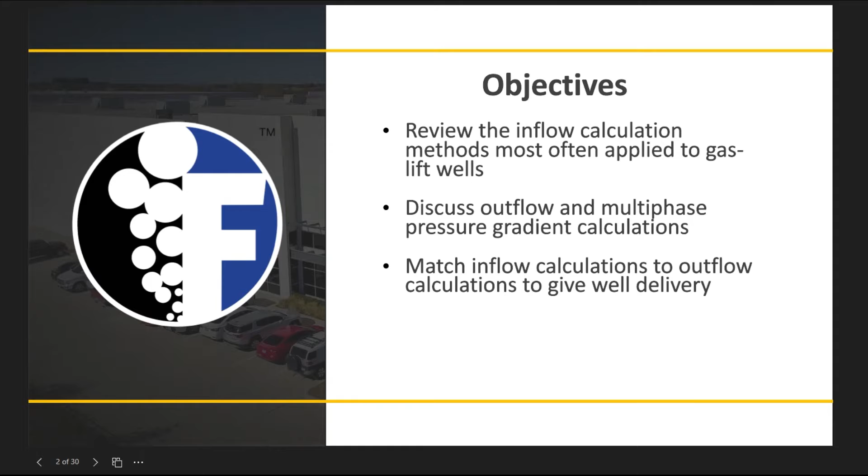Okay, so guys, we're on Series 4 this year, another technical presentation, primarily focused on production optimization utilizing a nodal analysis software. The objective of this presentation, and why we want to use some kind of nodal program for production optimization, is we want to look at both the inflow - what the well is capable of delivering - as well as the outflow, how we handle that production out of the well. We ultimately want to match those two up.

The inflow, we're going to be matching the production of the well, and the outflow is the only thing that we can really control. Good point. And with that outflow, like Robert mentioned, there's multiple ways to match it up.

If we have things like a downhole gauge or maybe an ESP on the well where we can actually collect that flowing bottom hole pressure, we can do a 1 or 2 production test Vogel IPR curve. If we have reservoir pressure, we can build onto that as well. So we'll point out some different ways to build that inflow calculation.

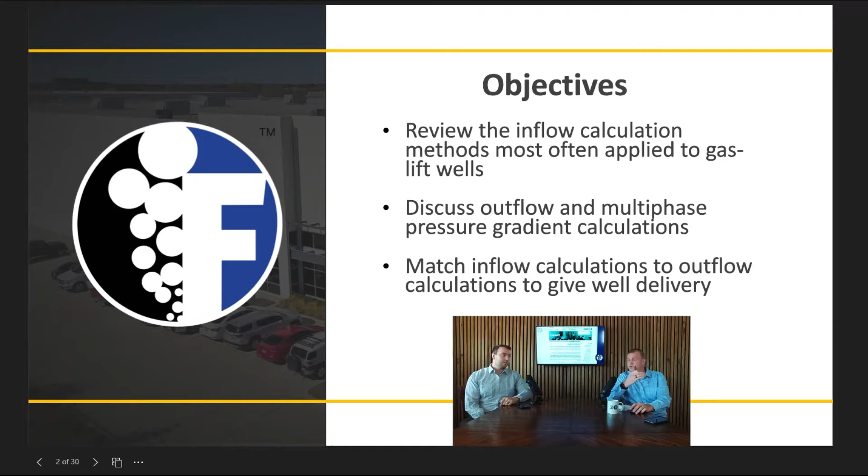But primarily we want to focus on the outflow, because those are the things that as a vendor, an operations group, or an engineer, we can control. We're in the artificial lift business, so that's what we're looking at. That curve is as pretty as possible - we live and die by those outflow curves.

So a couple things for anybody new to it: we'll call it an outflow curve, a multi-phase flowing gradient, a VLP curve. They're all essentially the same thing - it's the wonderful world of the oil field where one thing is named 5 different ways. Vertical lift performance - I like that one. Okay, we'll try to stick with that today.

But one of the pieces we look at from the VLP, that vertical lift performance curve, is it's a mix of a couple things. Ultimately, it is your flow diameter from tubing or perforations up to surface. Let me grab my pointer here so we can show it a little better.

Additional things that compound or add to that VLP curve are: what's our wellhead pressure, and more importantly, what's that pressure drop between our wellhead and our separator, typically controlled by flow line diameter and length. So we'll look at our surface piece that affects the VLP curve, and of course our VLP curve based off of flow area, PVT properties, production rates, things like that.

Ultimately, we're trying to match this flowing bottom hole pressure with our inflow to get the best production out of the well we can.

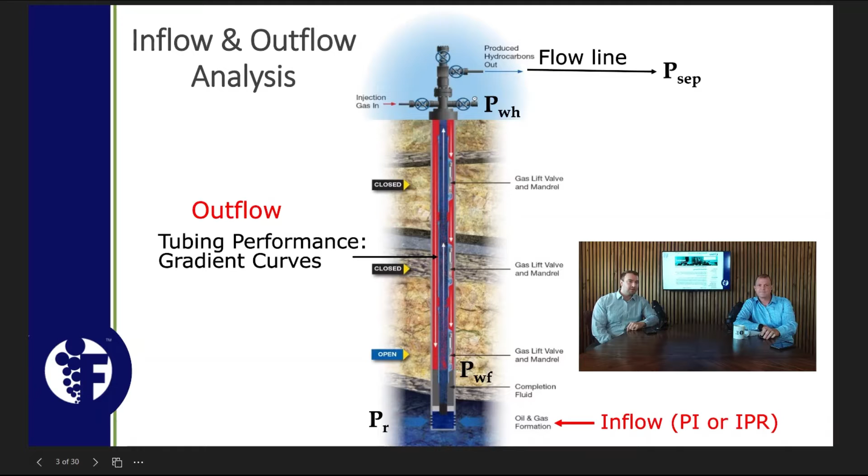But before we get started, we've got a nice little video here - borrowed from Neil over at Zeitecs. In my opinion, he does a really good job summarizing what we're going to talk about today between inflow and outflow. So we'll play this quick video for you guys, then get back into the presentation content.

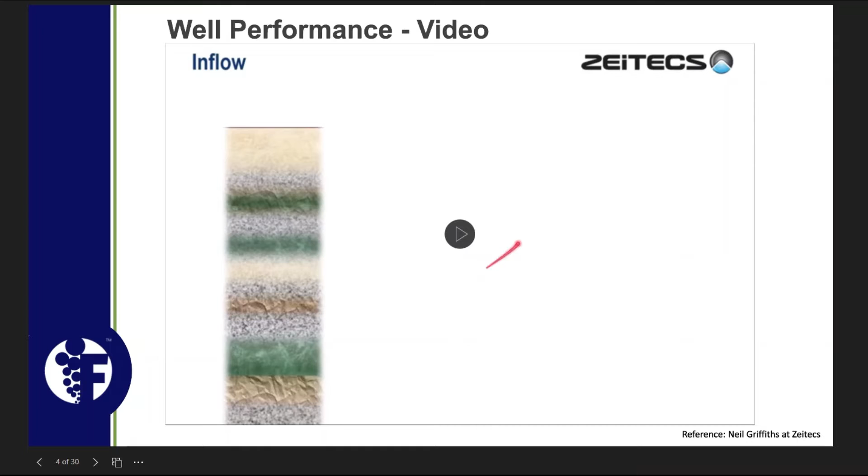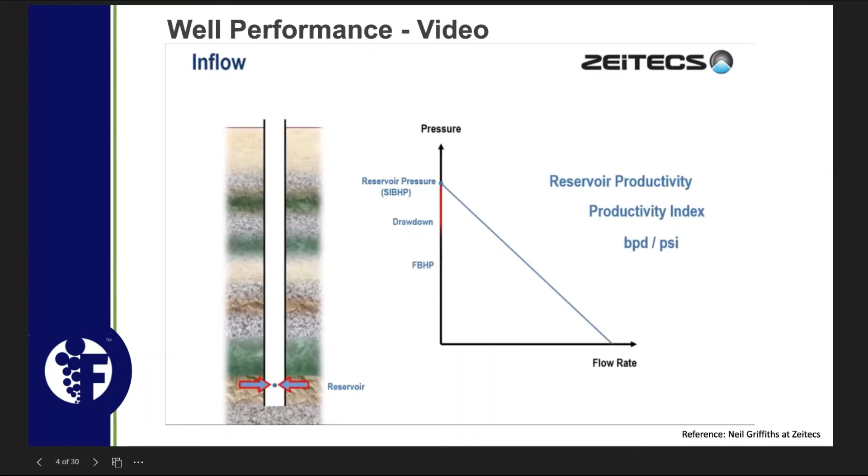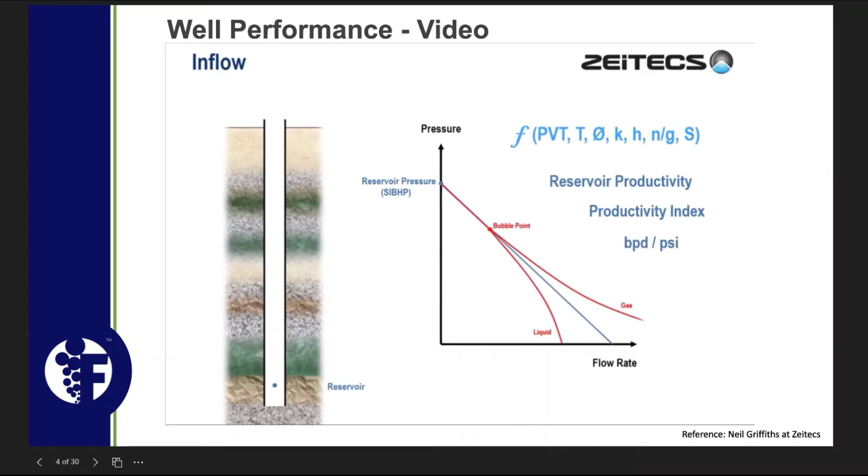Into the reservoir, considering an imaginary point at reservoir depth: this point will have a certain ambient pressure, known as reservoir pressure, or sometimes shut-in bottom hole pressure. The first concept is reservoir productivity, or productivity index, measured in barrels per day per PSI. If we draw down - lower the pressure at our imaginary point - fluids will flow to that point at a specific rate, giving a flowing bottom hole pressure. Draw down more, and the flow rate will be higher. Simple. But the great thing is all the relevant reservoir and fluid properties are built into this single line: PVT properties of the fluids, temperature, porosity, permeability, height, net to gross, and skin, which is the damage the drillers do when they drill the well. So we have a very simple but very powerful tool. I should admit to oversimplifying, because when the ambient pressure is reduced below the so-called bubble point pressure of the fluid, liquids and gases separate and have their own lines. A chap called Vogel had a lot to say about this back in the 60s, but anyway, I think you get the message.

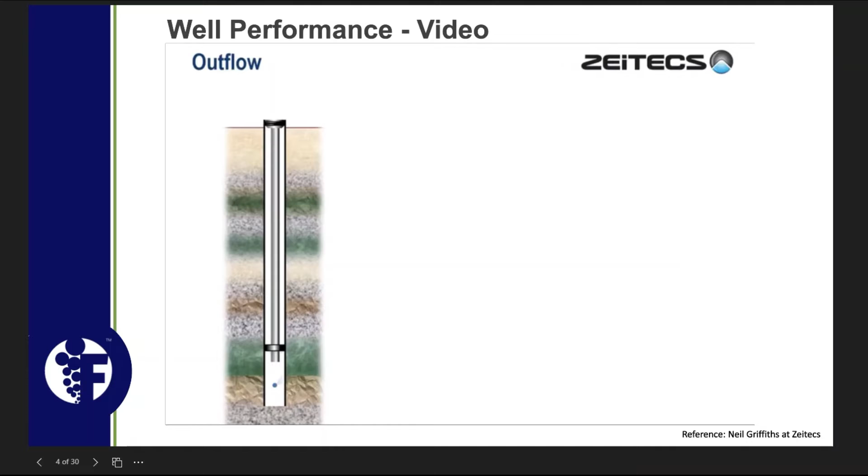So now let's complete the well and move on to outflow. Referring to the same imaginary point, a certain flowing bottom hole pressure is required to drive the fluids to surface - this is called the outflow performance of the well system. At low pressures and rates, the fluids tend to misbehave, but otherwise what we see is another very simple relationship: a certain flowing bottom hole pressure will drive fluids to surface at a certain rate. Higher flowing bottom hole pressure, higher rate. Simple. But the really cool thing is that all relevant wellbore and fluid properties are built into this line.

Again, the PVT properties of the fluid, the temperature profile, conduit properties, and tubing head pressure are all considered. We have a very simple but very powerful tool.

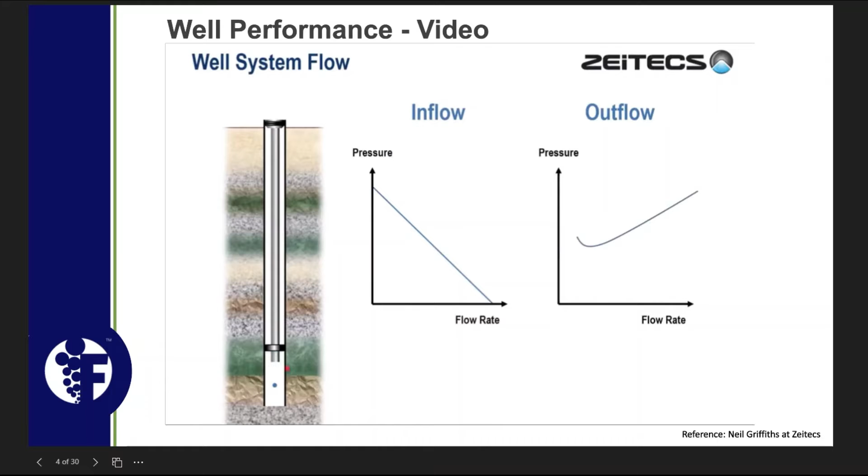So let's summarize. We have inflow and outflow relationships. Both refer to the same point in the well, and both are plotted on the same type of graph. That means we can cross-plot to see how much our total well system will produce. All things considered, our well will produce at this flow rate.

Sadly, however, this is not always the case. Sometimes when we cross-plot, the lines don't cross, and so there's no unique solution and no flow. This is a dead well, and I think you all know where we're going now. This illustrates the fundamental need for artificial lift.

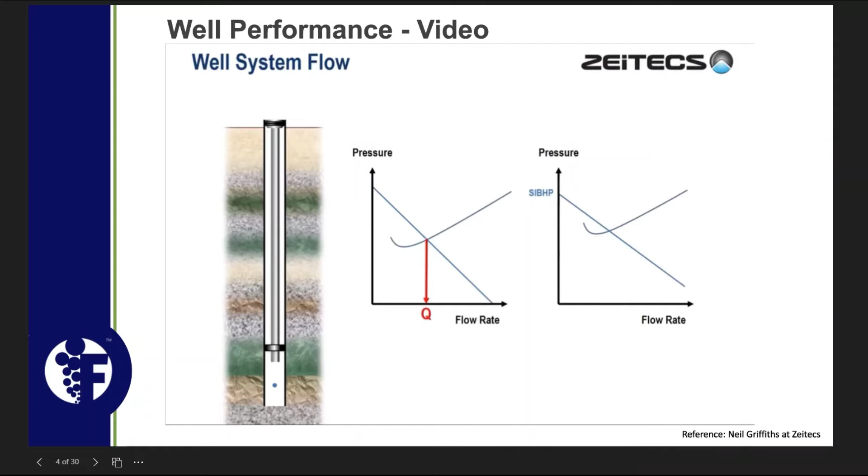But before we think about artificial lift, let's talk about other ways that we can make this well flow. Firstly, we can lift the inflow performance line. What we're doing here is increasing the bottom hole pressure without changing the gradient of the line, which is the productivity index. We make the lines cross.

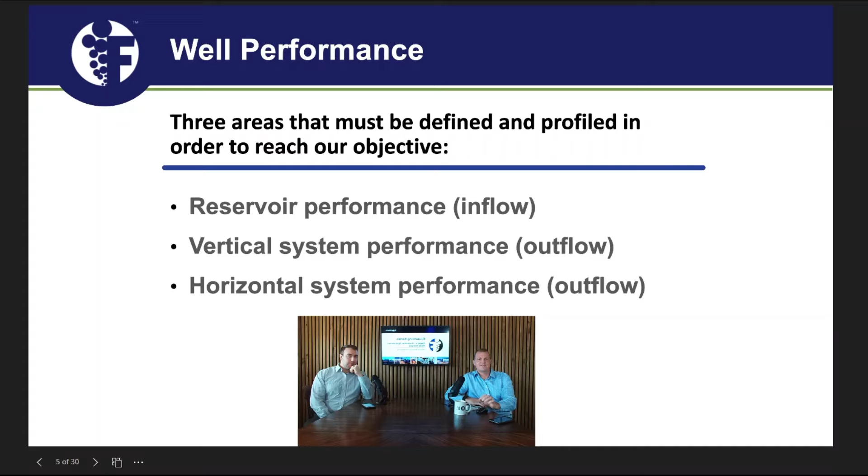So one thing we like about that video, Neil does a good job of just kind of illustrating those points and that kind of matching of both that inflow and outflow piece. So one of the few things we want to talk about is both that performance from the inflow side, what's the well capable of producing, and then secondary to that outflow piece.

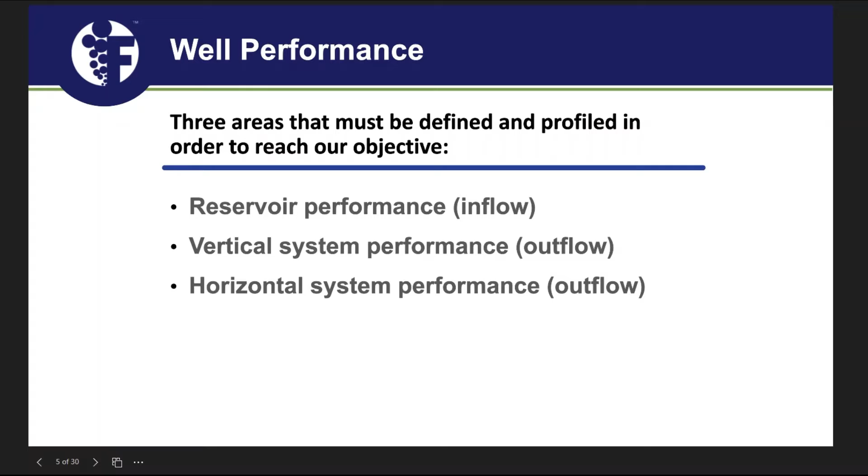That's the big piece that we can control, right? We can control that vertical system through tubing size and tubing placement. And then we can also control some of the horizontal systems too. How long is that flow line to the separator? What's our separator pressure going to be at? What's the diameter of that flow line as well?

So really, and this is where it becomes important, is bridging those two pieces together, bridging that inflow performance either off of maybe a target rate, if it's a new well that we haven't completed yet, or if it is a producing well, grabbing those well tests plus that bottom hole pressure to really build out that deliverability curve. And then once we have expectation for that deliverability curve, then we can match that VLP curve together with it. Again, like Robert mentioned, this is the big piece that we can control when we're ready to produce that well.

Yeah, lots of people like to look at things theoretically. They want to know what it's going to produce in the future and what we should optimize for ahead of time. But then you end up coming back and actually matching your production data and plotting everything to it. Yeah, so. Yeah, you're exactly right.

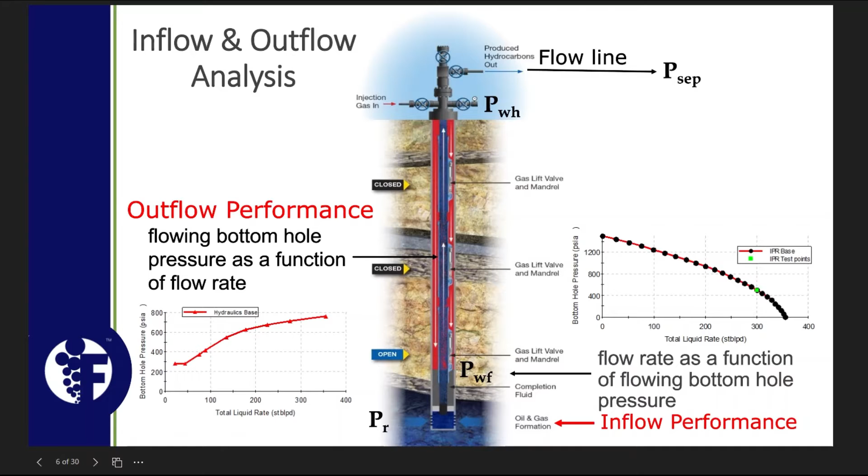And that's important. One thing to note about that comment, Robert, is we're primarily going to talk about what you'd call a high bubble point pressure, unconventional well, which means we're going to be following more of a Vogel type IPR curve. And with these unconventionals, this IPR curve is ever changing - it's always working its way to the left, either through a reduction in reservoir pressure or permeability, or sometimes both. So it's important that when we are making these deliverability curves, we need to update them when we get new tests, new bottom hole pressures, things like that.

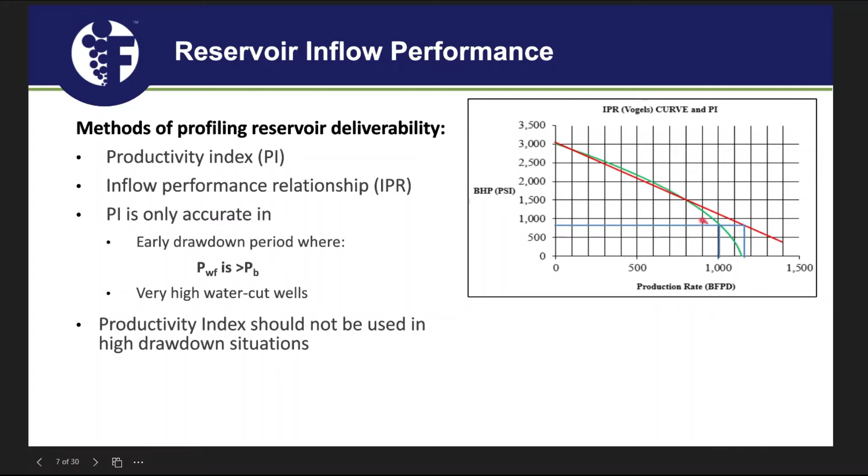So this little graph here kind of represents the difference between a PI, productivity index, and our inflow performance relationship, that IPR curve. They tend to follow a similar linear path until you hit that bubble point. In my opinion, it seems like most of the time when we're looking at something like artificial lift, we're already past that bubble point pressure, so we're already kind of on that deviation away from that PI. So typically, we're going to deal with that IPR curve, right? Yeah.

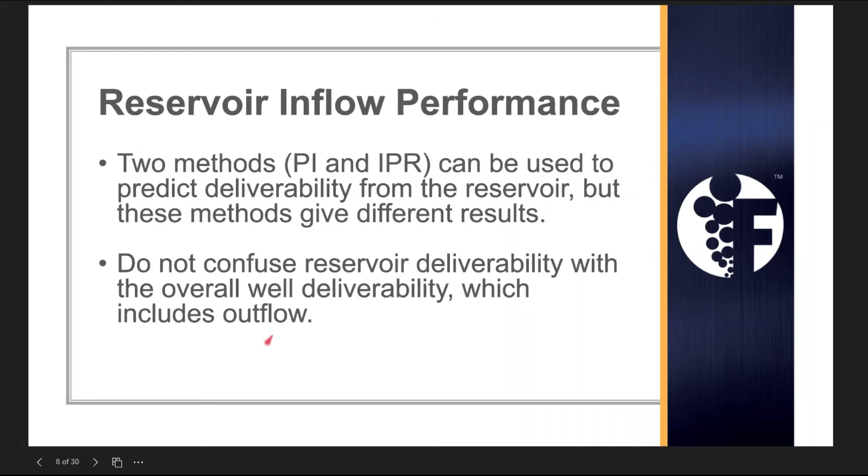So again, like we said, two methods here, PI, IPR. Usually when we're considering things like tubing and artificial lift, we're already past that bubble point in most cases. So we typically focus on that IPR, at least from your unconventional standpoint.

So again, to talk about that inflow piece - like Robert mentioned, we can't really control that. But what we can control is that outflow side. And so understanding what our handling capabilities are against that production rate is important, and then picking the right systems in place to do that.

And that could be, and you'll see examples of this, but that could be what? Tubing size, flow path, wellhead pressure through like flow line size. Maybe we need to upsize our flow lines if we're flowing back to a centralized tank battery, things like that. And then, of course, picking the right gradients as well.

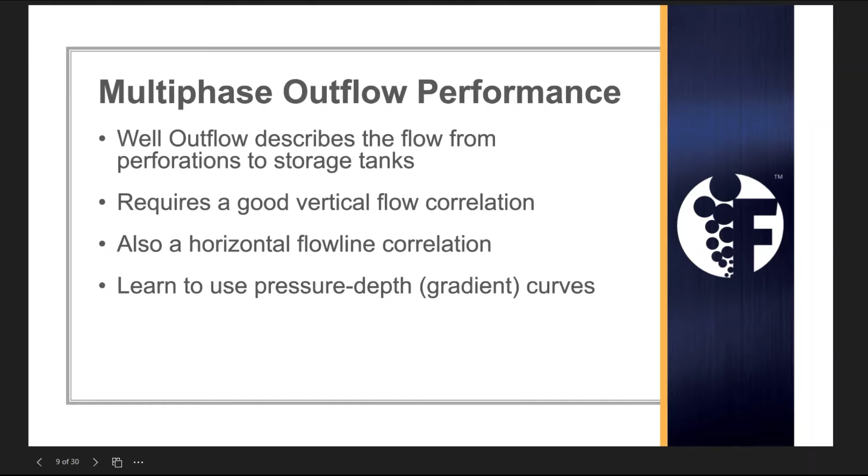Okay, yeah. So one of the things, again, from that outflow side, we want to look at how low can we get our separator pressure, right? Our separator pressure along with our flow line will back up and either benefit or hinder us on that flowing wellhead pressure. And of course, there's other things we can do, like removing chokes or any kind of directional change on our wellhead.

Other things that can affect that VLP curve are going to be like deviation, of course, which we see with these unconventionals, especially multi-pad type directional drilled wells. Water cut's a big one, and of course, just the general physical properties of the fluids we're producing. If we're producing heavier water, higher water cut, our friction's going to take over. We're going to have more pressure loss from that, which will lead to a higher flowing bottom hole pressure. And of course, that coupled with tubing size can really compound those frictional pressure losses.

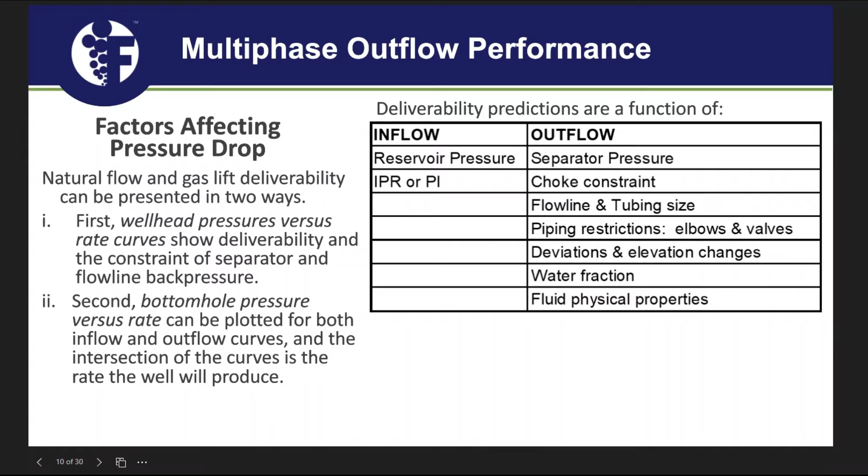And let's jump ahead while you're talking about that, Robert. So when we talk about those multi-phase flow correlations, here's just a couple reference. But yeah, you bring up a good point, is that a lot of these, especially the empirical models, don't typically take deviation into effect, or it's not a big factor in terms of that. I would say almost none of them have any sort of deviation built into them. Yeah, so that's kind of where the bleeding edge is right now in terms of trying to model this stuff.

But we stick to Hagedorn and Brown for our high liquid rate stuff. Duns and Ros is going to be your good one if you have a gassier well. It's usually good for lower production, talking like 2, 3, maybe 600 barrels a day on the high end with a lot of gas. Higher GOR type wells. And then if you have a gas well, you're going to be looking at something like a Ros and Gray correlation.

So I see a lot of people trying to utilize Beggs and Brill for gas wells. Yeah, I think that one was really more for pipelines, and so it doesn't tend to match up - I haven't seen it match up anywhere, to be honest. Okay, so I know maybe in your dry gas, like Marcellus, where their liquid yields are super low, I've seen that one used, but I agree with you. Typically when I use Beggs and Brill, I'm using it on the flow line side. I wouldn't think it would be a good one in Permian Basin or Eagle Ford.

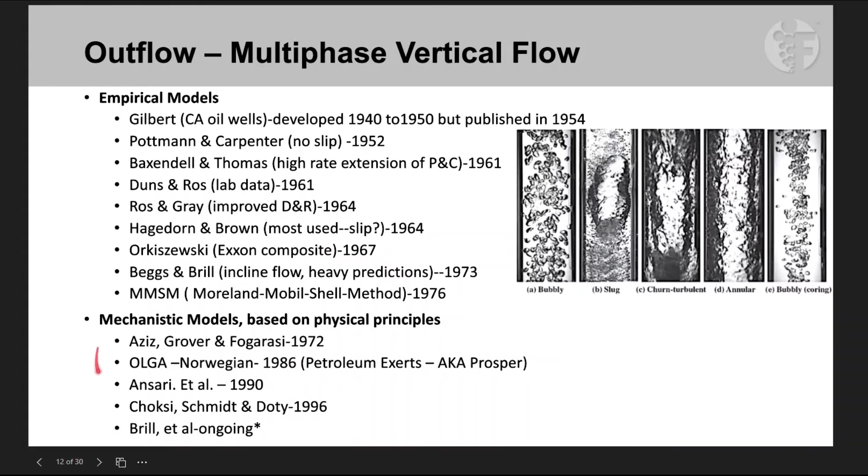We'll go back, but while we were talking about that, just want to touch on that. Just kind of a general overview of outflow performance. What we're trying to do is match these VLP curves, we'll stick with one terminology, with our deliverability or our IPR curve. Based off of that intersection, we can then see what our flowing bottom hole pressure is and what our correlated production is.

And it can also be helpful for a case like this one here, when it's not intersecting, what does that tell us? As I explained it to someone the other day, that dark green curve, your IPR curve, is what the well is actually capable of. And then the more left to right VLP curves are what your well can actually produce at. So the point where those two meet is where your well is going to produce, ideally.

We'll have a good example here in a little bit. The nice thing about these IPR curves is they are non-dimensional, so if you can reduce your flowing bottom hole pressure to achieve a delta P of like 50% of a reservoir, you typically can achieve 70 or 80% of overall production. So what that means is a lot of times we don't necessarily need to push way down, we can operate higher up, and the difference in production is typically pretty minimal.

Good point. Which is why you don't see ESPs on later life stuff, usually they transition to something else, because you don't need those massive drawdowns at that point.

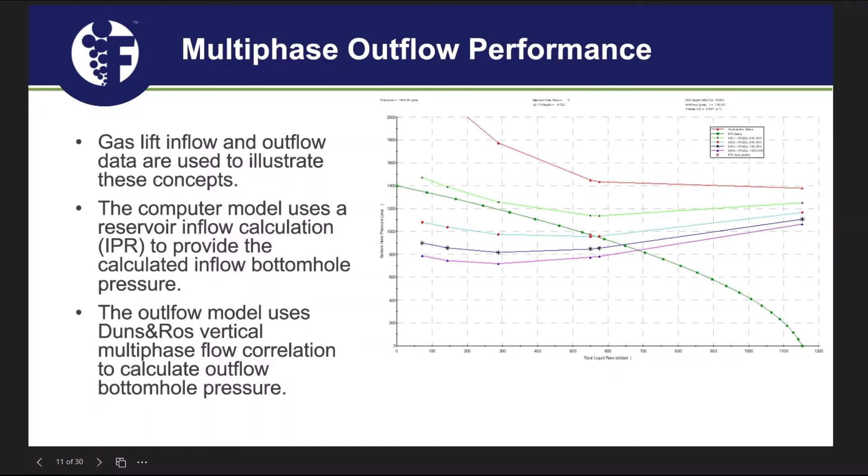So let's keep going through that, and really the bulk of the presentation is what we really want to talk about: how we can use this for production optimization, and then run through a couple examples. A big one I always get asked is, what size tubing should we put in there, either for initial production, or more importantly, later life, when maybe we have oversized tubing in the well but the production's way down. So that's a big one for your VLP.

That's probably the most common request we get. Nodal analysis stuff, I see that one quite a bit.

You're right. And on this one, when you look at those flow correlations, your flow area has such a big effect on that flowing bottom hole pressure, either positive or negative, that it's really important to size that, either if you're trying to achieve an IP, or probably more importantly in my opinion, that long-term life of the well, assuming your tubing's not going to fail.

And just like a pizza, small changes in radius are going to have a big effect on your flow area. I like your pizza reference on that. Pretty good. One of the things we talk about with tubing size, of course, is life of well.

If we plan to keep this well in some kind of dynamic form of artificial lift, understanding that tubing size, not just early on, but extending that through the life of the well, so hopefully we don't have to make a tubing size change later on in the well's life.

Of course, if we're looking at gas lift, we can use that production optimization to understand injection gas rates. Is too much gas going to cause some frictional pressure loss and hinder production, or are we not injecting enough and still have some capability to get more production out? I see this one being really important with operators that have centralized compression, because they can start playing that allocation game of which volume of gas do we send to which well to get the best production.

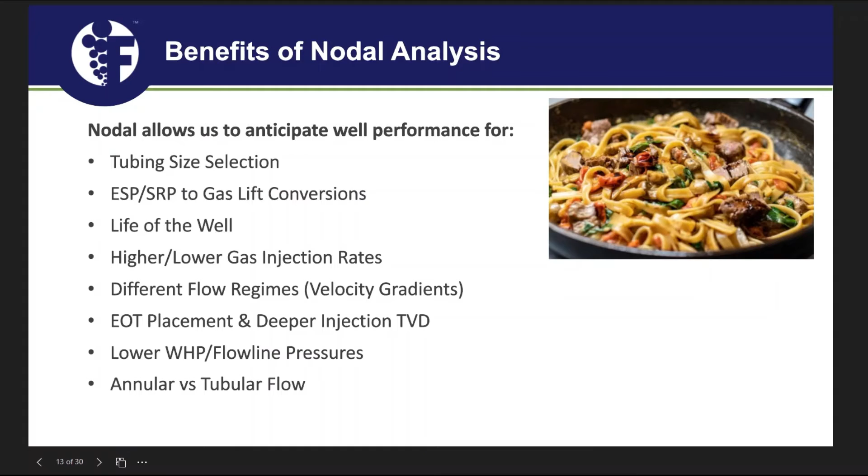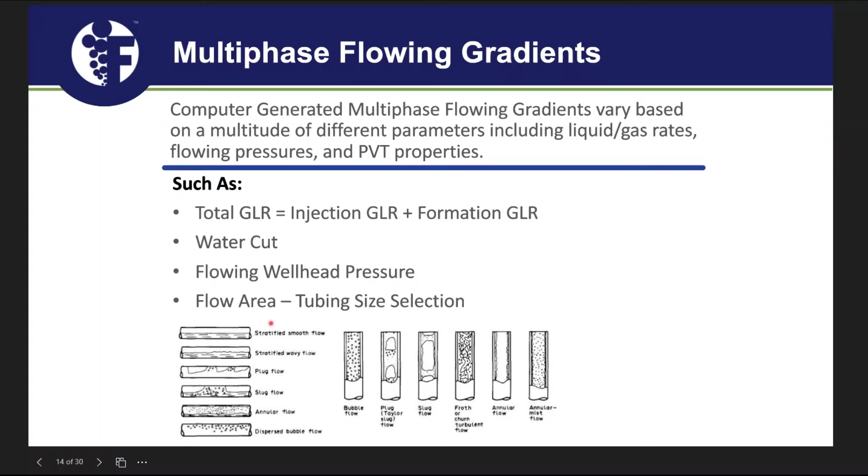Yeah, so good stuff. And we'll show you guys examples of all these as we move through it. So again, kind of looking at some of these examples, like our total gas to liquid ratio, that GLR, if it's on gas lift, injection gas plus formation gas, of course wellhead pressure, flow area, all those things are really important when we're looking at these outflow curves. So we'll go to that and show.

These curves are exponential, so changing your wellhead pressure will have a much higher effect in the early life of the well when you have that lower GOR or lower GLR. That wellhead pressure matters a lot more in the early life than in the late life. And adding gas only does so much up to a point.

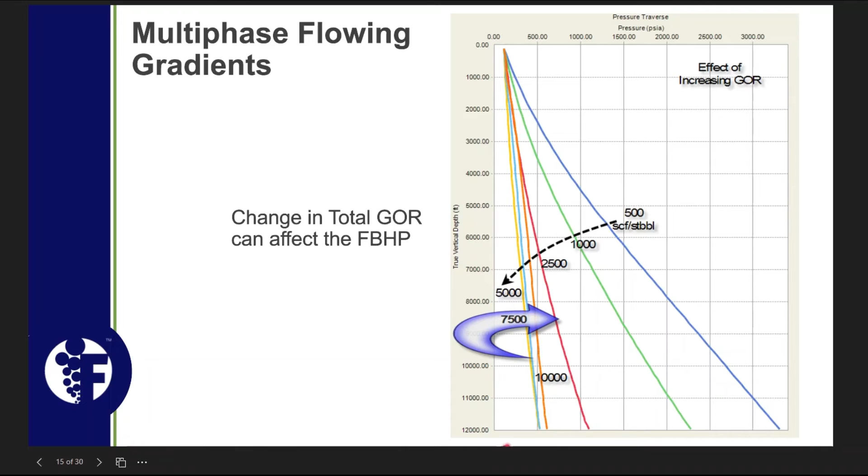You can only reduce the density of the fluid by so much. And since the gas has a density as well, ultimately your best reduction in density is simply going to be a wet gas gradient, assuming you're not maxing out the flow capacity of your tubing size. That's when you start to see that reversal.

But as that well ages out, we can say maybe we can reduce injection gas, or injecting at the highest volume is going to yield the same production as the lower volume, just because we've essentially maxed out that density reduction. We simply can't reduce the density of those fluids anymore.

And realistically, as we said, that IPR curve is not just going to reduce in reservoir pressure. The slope of it will actually change too.

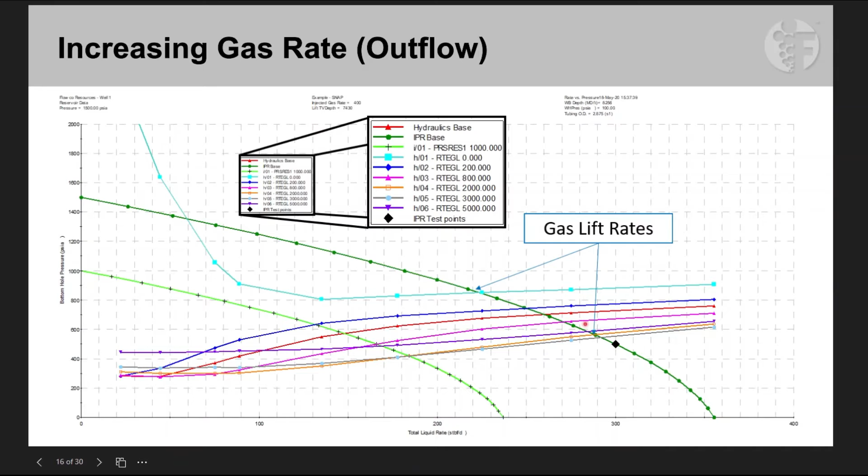I think our next slide illustrates that. What we're seeing here is just a gas lift performance curve. It's looking at production on our Y-axis and injection gas volumes on our X-axis. You can see that to a point, as we increase our injection volumes, we're getting pretty good yields in production.

But eventually we tend to just max out that volume capacity of our flow area. And after a point, we tend to just flatline and actually start to see a reversal in that production. This is a later life well, you're seeing like 200-300 barrels on that Y-axis, and I think it's 2 3/8 inch tubing.

That's a good point, Robert, your flow area is going to have a compounding effect on that too. If we made this a smaller tubing, we'd probably see a quicker reversal. But if we had this as annular flow, it tends to just constantly increase because our flow area, our handling capacity, is just so large.

You can see that even as you start to over-inject, it doesn't have a massive effect on your production, unless you want to get into talking about port sizes and moving up valves. We'll leave that, save it for another discussion.

But this one's good, I prefer this one, especially when we're looking at multi-well compression or centralized compression, because then you can build these curves based off water cut, total production of the well, and ideally send your peak gas volume to your lower water cuts or your higher producers, and scale back injection volumes for maybe your lower producers or higher water cut wells.

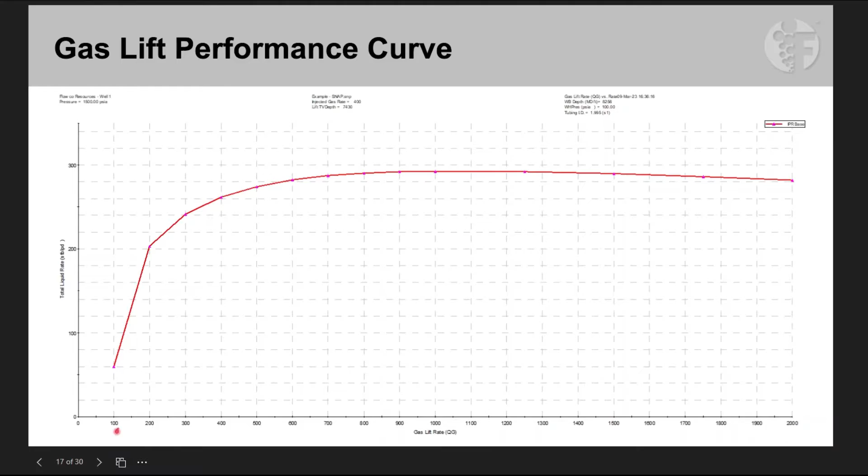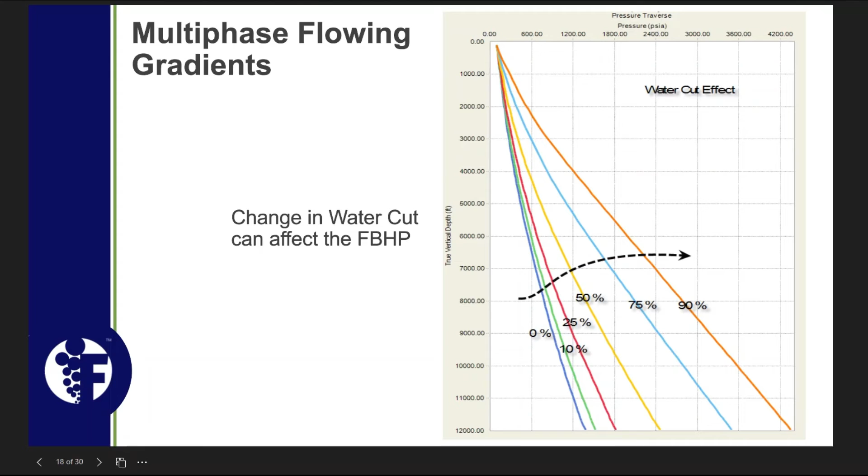So from an operation standpoint, Robert, a lot of times we'll see, if it's casing flow, we flow out of two sides or two outlets on the flow block. Or maybe if we have 2 7/8 tubing in the well, we run a 3.5-inch flow line, things like that to help reduce that surface pressure as best as we can. And taking the bends out of the tubing, that's a big one. Making sure your flow line's as straight as possible.

Yeah, because any kind of directional change, especially 90-degree directional changes, really hinders that. An old saying I remember was 90s equal a bull plug. So if you have several 90-degree turns in your wellhead, you might as well just close the well. You might as well think of each one as putting a little choke in there, a little pressure drop essentially. I've never seen 9 on a well, but I have encountered 5 or 6 directional changes from the wellhead to the separator. So you think about how those little chokes end up backing up to your wellhead pressure.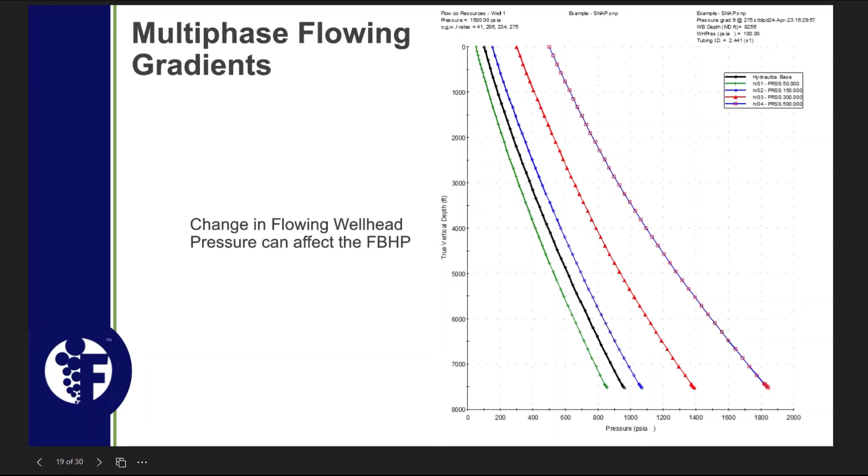We'll talk about that one quite a bit because it's really important. Here's another representation of that VLP curve, independent of the deliverability. This is what it actually looks like when we match that change in wellhead pressure against the deliverability of our well, and you can see this is our highest wellhead pressure, and this is our lowest wellhead pressure.

That's significant, right? That's 30-40% of your drawdown. And even the smaller wellhead pressures, you can see there's a big difference between 150 and 50 and 100. That's 50 barrels, that could be just through a simple wellhead pressure change, just for a 50 psi change. This is when it really becomes important, because this is actually matching what our wellhead pressure versus our deliverability is. I based this model off of a real late life well, so you can imagine if you're looking at early life, it's just going to be that much more of an impact.

Yeah, exactly, so a big one, really important to look at. You can use this for a casing flow well, or for really any kind of artificial lift, because any artificial lift typically is going to benefit from a lower wellhead pressure. There's some ESP and some sucker rod guys that might say you might get some more gas breakout in the pump and things like that, but ultimately, any kind of reduction in wellhead pressure for any form of artificial lift, and even a naturally flowing well, is always beneficial.

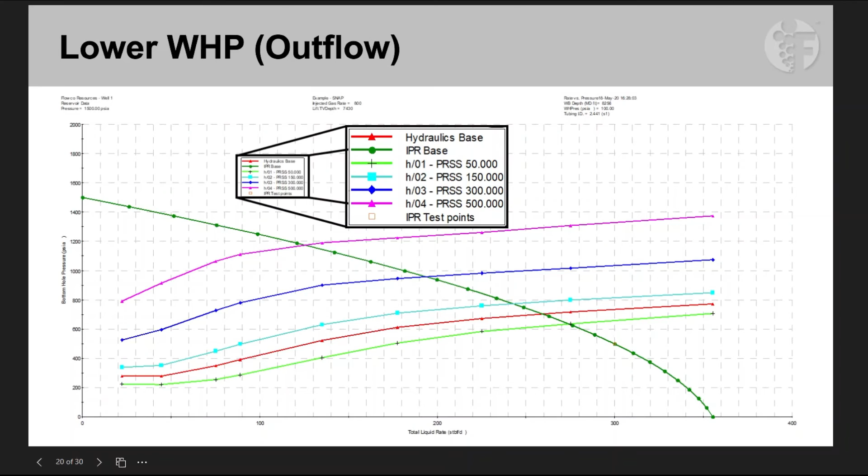So let's talk about another one that's really important: flow area. I'll look at it from just a tubular standpoint, and then also how we can change that flow area from things like annular flow. This is the big one too, right? Our flow area is probably, what do you think, maybe our biggest factor when it comes to those multi-phase flow correlations.

So if you increase or decrease your flow area, you can change your flow and bottom hole pressure. Here we have a couple VLP curves from 2 3/8 to 2 7/8, 3.5, and I guess heavy wall 4.5 inch tubing. You can see that as we increase that flow area, we can reduce that flow and bottom hole pressure.

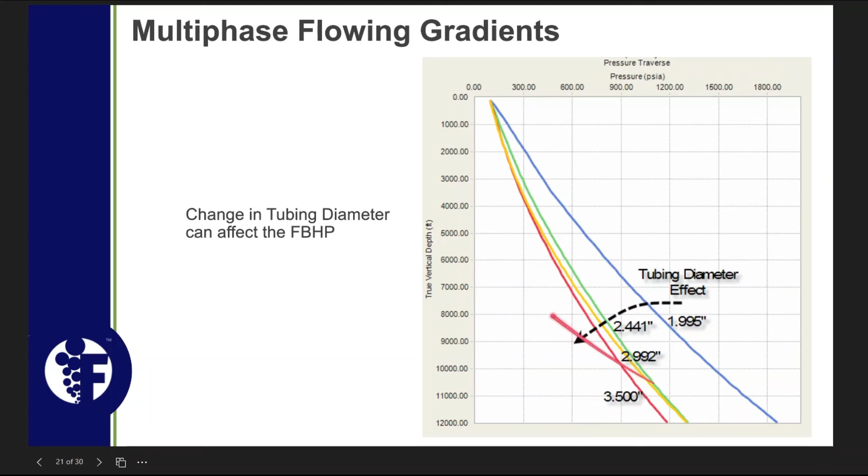One thing I like to note about this is it does have to match your production, meaning that we don't want to set big tubing for a low production rate. When we're looking at these flow areas, these tubular sizes, we want to match them to production, meaning that if we're going to produce 100 barrels a day, we probably don't want to put 3.5 inch tubing in. But if we're going to produce 3,000 barrels a day, you're going to need it. So you need to size your tubing to your expected production.

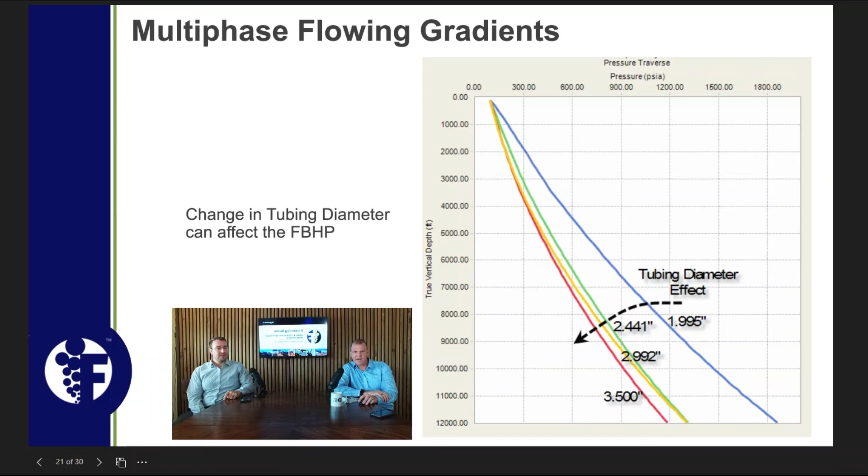I think this next slide hopefully illustrates that. In the next couple of slides, we look at our different VLP curves for different tubing sizes and we match those up to the production rate. Here we can see that maybe this tubing is a little too small for that production rate, but then these two sizes tend to overlap with each other.

I think this one was meant more to show, in a late life scenario with a lot of gas, looking at a Duns and Ros curve, the larger tubing isn't going to give you a benefit here. Essentially they cross over. I think the base case is 2 7/8, and the larger one might be 3.5 inch. So you can see in this case, our volumes don't meet that flow rate or flow capacity, so then it doesn't make sense to upsize that flow area.

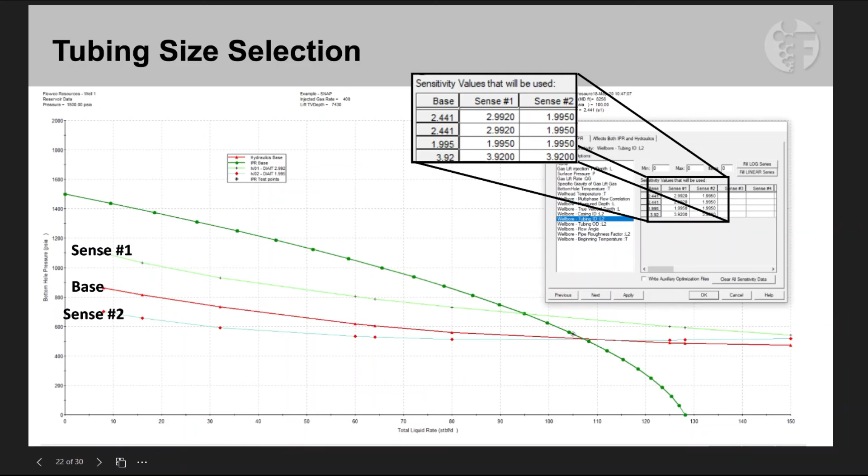I'll jump ahead a couple slides to illustrate another version of this. Again, we're changing our flow area, increasing or decreasing it, but instead of just making our tubing bigger, we're changing our flow path.

A little history behind why we're doing this: typically we're constricted by our casing size. What's typical casing size in these resource plays? Usually 5.5, probably the most common. We can't really put more than about 2 7/8 tubing inside. Maybe we can do 3.5, but the fishing superintendent's probably going to be pretty mad at us if we do that. So looking at it from this standpoint, we're starting to see a substantial difference in production rates just by changing that donut, that flow area size. We've got a lot of food references in this one, don't we?

So with this one, it would make sense at this point of the well's life to maybe go to that annular flow, right? But what you illustrated here is some later life deliverability curves, and that benefit starts to kind of peter out. It's just because we don't have the volumes to fill that tubing capacity, that flow area capacity. So maybe annular flow makes sense up here, but we need to start considering conversion to tubing flow at these later lives of the well.

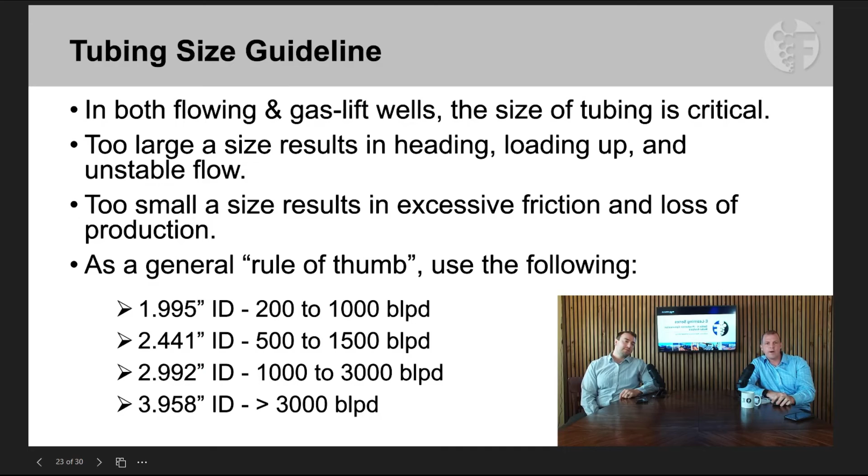Good points on that. This is a big one - I really like looking at this type curve, tubular versus annular, especially when you're transitioning from casing flow. If you have the biggest flow area with casing, and then you're trying to pick your tubing, this becomes really important, because we've seen cases where there's casing flow, they put tubing in, and they get this iconic stair-step drop in production and want to know why.

Well, there's your reason - that's the next thing. We put a hybrid design in where we have gas lift valves for both annular and tubing flow, and we get constant requests: should we switch it now? No, wait - go and wait, update, wait till you get down to like 800 to 1,000 barrels. Then you can swap over, because as we talked about, where it meets the IPR curve is where it's going to produce, and in the later life there's very little difference on the x-axis. So that's probably where you'd want to swap over.

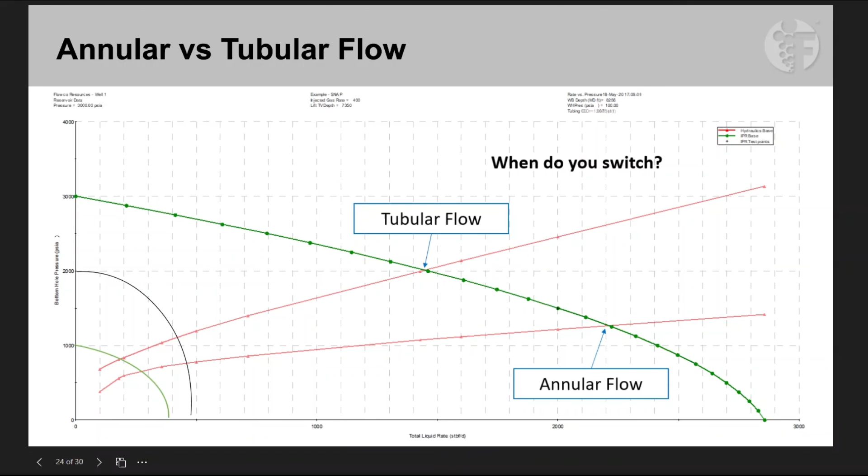That's a good point. So this is outside of gas injection - I really like that production optimization software for analyzing your flow areas, because your flow area is one of your biggest factors affecting those VLP curves.

One last thing we talked about early on is matching that data correctly. There are a couple different ways to pick your multi-phase flow correlations. You could take a dart and throw it, and whichever one the dart hits, you go with that. Or you could use reference from offset wells or operating areas, or collect data such as flowing bottom hole pressure, typically through a memory gauge or a live downhole gauge.

In this case we have a flowing PT survey. This is the most fun part, like what I was talking about earlier with the spaghetti weather forecast, all the spaghetti lines for where the hurricane's going to go. It's the same sort of thing here, and you can see we've got five or six different models on here, and only one of them fits our flowing PT survey.

So we know this is the preferred multi-phase flow correlation for this data. And here's another one where we've predicted a higher flowing bottom hole pressure, or production gradient, versus a lower production gradient. We find this one, I think it's Hagedorn and Brown, tends to match up quite well with that data survey.

Just to make it clear, the little crosses on there are your flowing PT survey, the actual pressure data that we collected in the well.

And so you can do this with a survey like shown here, or you can try to predict it with a single data point. What you tend to lose with a single data point is some of these pressure changes up above, but you can still use that information. It is important to ask around to see if you can collect that data to match these up.

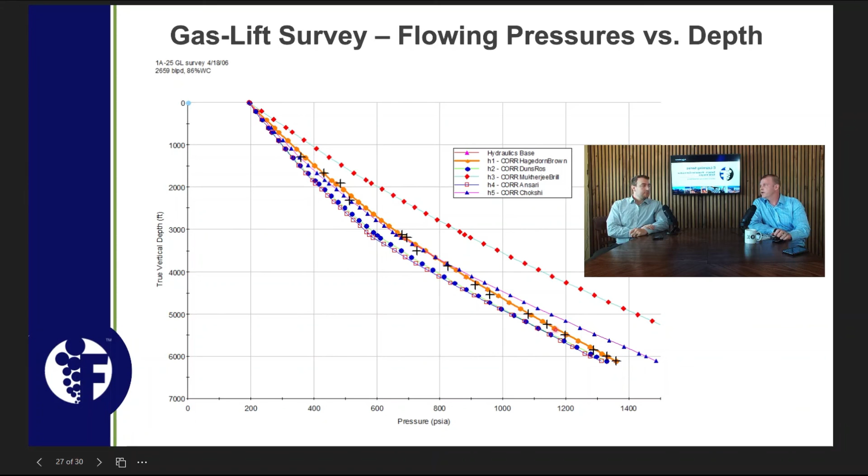Good point. So a couple other things to summarize: you can use this for any type of well evaluation—picking tubing sizes, expected production rates, artificial lift, if we have it on gas lift, how much to inject. So you can use it for a multitude of outflow performance. Of course you can use it for inflow too, but we primarily wanted to talk about it from outflows. And we didn't even talk about depth of injection.

You can also look at where you should set your tubing—should we set the packer a little bit deeper? How's that going to affect your production? All those things go into it. Yeah, you're exactly right.

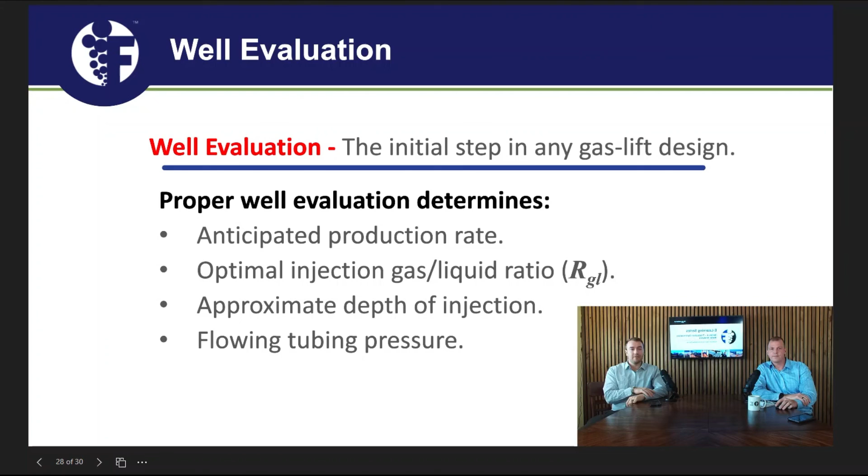One of the big things you've brought up a couple times is to calibrate that data to well tests and flowing bottom hole pressures, for both the inflow and outflow side. Of course, we'll mention it one more time: minimizing that wellhead pressure throughout the life of the well, both early on and later in life, tends to have a big effect on that.

And in early life, people really preach choke management and not letting the well off too quickly. But frankly, if you're opening the choke up all the way at the beginning and the well's dying early, that just tells you that you need to put artificial lift in sooner. Yeah, that makes a good point.

And then really pairing that inflow and outflow together to understand your expectations of the well. That's a big one I see often too—an operator puts a well on artificial lift and then calls and asks why aren't we making 4,000 barrels of fluid a day. Well, we go back and look at the delivery curve, and even at the absolute open flow, they can't make 4,000 barrels a day.

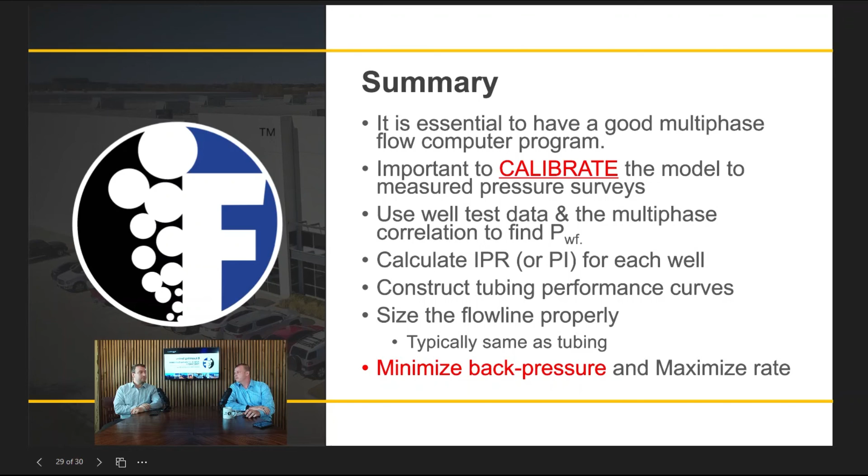So understanding that relationship, you can expect, if you put this well on any type of artificial lift, what's the max flow you should be able to get out of it. Whether that's ESP, jet pump, or gas lift, you should be able to use that. If the well's going strong at the start and you try to put gas lift on right off the bat, and you see a drop in production going from casing, that tells you you're putting it in too early. Yeah, friction's taken over at that point. That's the other thing we didn't talk about, friction is relatively easy to calculate in these things, to understand how much effect it's going to have.

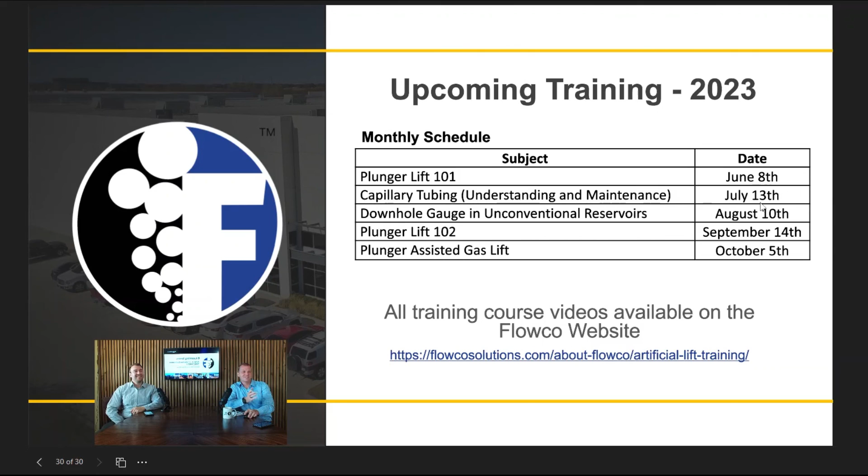Fun being in front of the camera today. Yeah, I'm glad you could join us. So I'll stop sharing this. We'll switch to Q&A and wrap it up for you guys.

Perfect. So one of the things that I saw, Robert, from the question is, when we're wanting to build a deliverability case for the well, what kind of information do we need to be able to build that inflow and outflow relationship?

The big one that operators don't tend to have is usually your reservoir pressure. That can have a big impact, especially at the top of the curve with your PI. If you don't get your reservoir pressure right off the bat, the differences, like if you're modeling tubing, for example, 2 7/8 versus 2 3/8, the 2 7/8 is going to show a lot more production gain. So if you had too low of a reservoir pressure, that's going to give a higher PI, and that would make the 2 7/8 look a lot better than it should. Whereas if you have too high a reservoir pressure, you're going to have almost a vertical line and a really low PI, and it might show you can use 2 3/8 at 2,000 barrels.

So you might underestimate your tubing size on that. Yeah, that's a good point, so reservoir pressure, or a way to estimate it, is important. The IPR and VLP curves are really a great way to visualize how any change to your well or your reservoir is going to impact production. So if you're unsure on reservoir pressure and can't shut the well in, you could probably do a min and max within an expected range of reservoir pressures. Yeah, that way you can at least see, we do that all the time, that can be your P90 or your P10 case for the well.